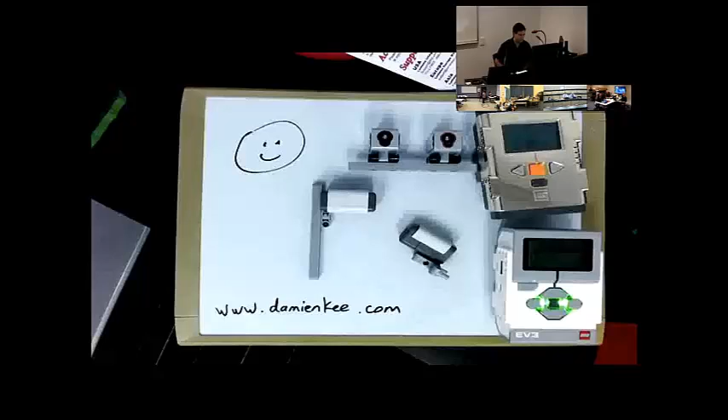Now, you all look very, very tiny to me, so I'm just going to get you guys to wave your arms madly if you've used the light sensor before. Wave your arms madly if you've used the light sensor before. All right, now wave your arms madly if you've never used the light sensor before.

One, but you're in a room with people that have? All right, excellent. So what we're going to do, firstly, is get ourselves some readings. So what I'm going to do is set myself up a little bit of a line here. So here is my black line that I'm going to follow.

It's pretty crude, and I can see in the video feed that you guys have brought your own, either printed out or a bit of masking tape or something like that. What we're going to do, I want you please to grab your device, and we're going to bring up the view menu.

There are two different ways to do that. If you're in an NXT, we're going to scroll across until you find the view menu. Select the view menu, scroll until you find the one that says reflected light, and then it's going to ask what port you're connected to, and we're going to say port 1. So I'm going to grab a cable here and pop it onto a light sensor, and I'm going to select port 1. You'll notice instantly that there's some red light coming out of that. So that's with the NXT.

With the EV3, it's slightly different. Across the top we've got our 4 tabs: play, 2 bits of paper, 6 circles, and a spanner. We're going to go across to our 6 circles. In there, find the one that says port view, it should be the top option. Inside that, you can then have a look and see what's plugged into your EV3 device. So I'm just going to plug this one in here, and you'll see again some red light coming out.

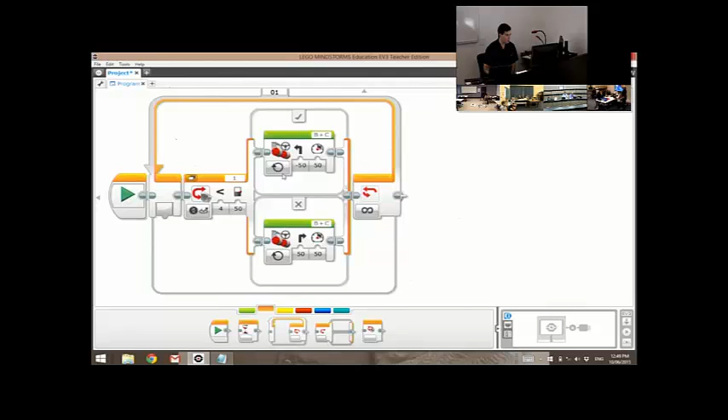and loop back to the start, so we can do this over and over and over again. Take a measurement, turn left or right. Loop back to the start, take another measurement, turn left or right. Loop back to the start, take another measurement, loop back to the start, and so on. So can you see how this loop will just keep going and going and going? And it'll just follow that line all the way along.

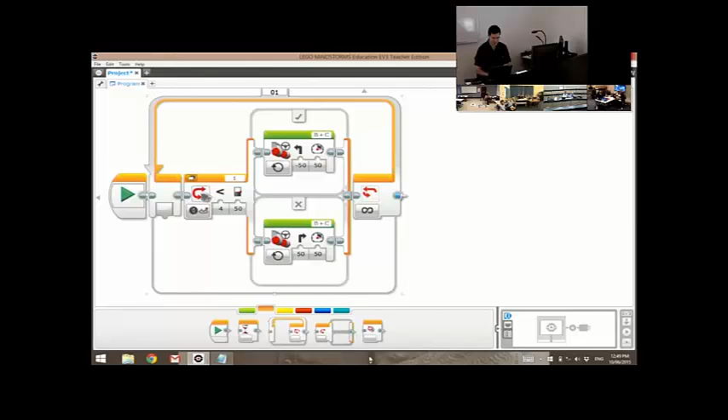All right, so for those people doing NXTs, let's flick across to the NXT programming language. NXT works exactly the same way, the ideas are exactly the same, it just looks a little bit different. So let me maximize this. I'm going to start a new program.

This bottom one down the bottom here is our switch, this is our decision block. So I'm going to put that decision block in there. What do we want to make the decision based on? Light, it's going to be a light sensor.

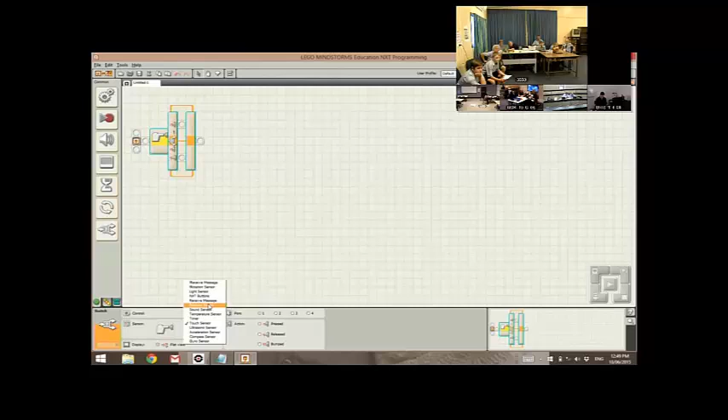Within our NXT, can you see how there's a bright sun and a dark sun? Yep. So the bright sun says I can see a high value, and the dark sun says I can see a low value. If I can see a high value, what does that mean? White, is that black or white? White, that's going to be white.

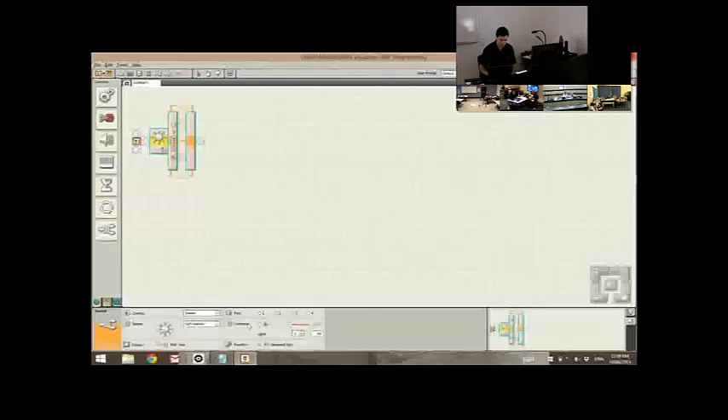What did I say I wanted to do? Follow black. If it's white, we're going to turn towards the black line, which is turning to the left. So I'm going to take that all the way across, and then I'm going to bring it back one little notch. That's the tricky thing with the NXTs, take that steering all the way across, and then bring it back one little notch.

And how far do I need to turn? What sort of duration do I want to go?

Which one of these do I want to choose? Unlimited. It's going to be unlimited. Because I don't know, I just keep turning until I see the white line.

No, you said do it and then take it back a little. Drop the power level down as well. 100's a little bit too fast. We're going to start off nice and slow, just make it 30% power. And I'm going to do the same at the bottom here.

But what's going to be the difference with this one? It's gonna see the dark. This one's going to see the dark. So we're going to choose unlimited, and this time we're going to turn to the right, all the way across, and then one slight notch. I'm going to make this 30% power.

All right, do I need anything else with this one here for NXTs? No. Oh, I'm forgetting something. What am I forgetting? The dark numbers, the percentage. Percentage is right in here. What was my percentage again? 50. So I don't have to change mine.

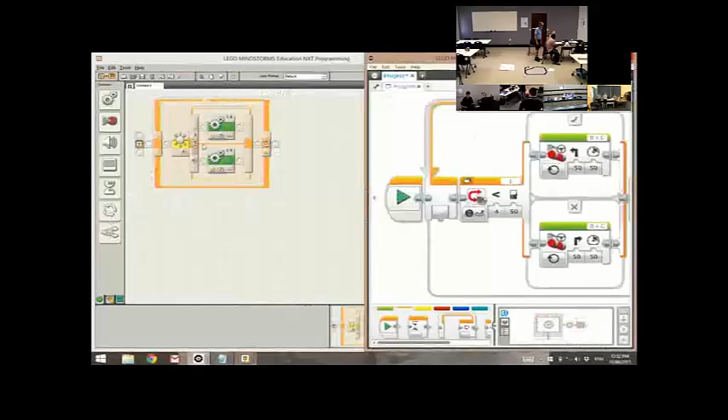Can you please show again how to loop with the EV3? So loop with the EV3 is this block just here. So if I do that all again, let me take that outside the loop. Delete the loop there. So I'm firstly going to, and then I'm going to drag that one inside the loop.

All right, I can see one robot following that line quite nicely. Yeah, it's coming off every now and then.

With all this line following stuff that we're doing, there are many, many different ways of doing it. So just because I'm showing you this one particular way, doesn't mean it's the only way to do it. Oh, I can see another robot following a line. Excellent.

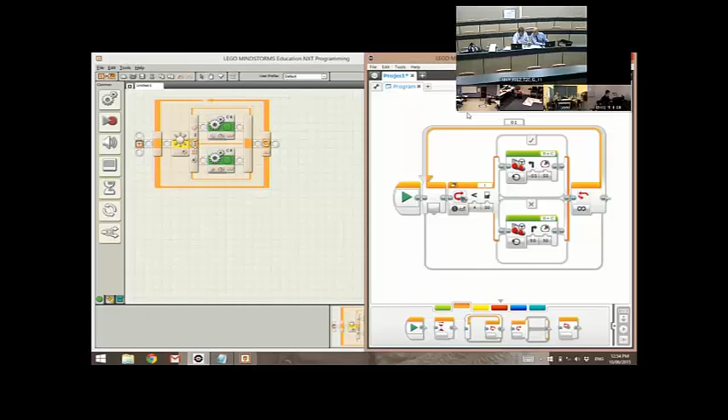100. All right, wave your hands madly if it's not following the line. Everyone got a line following working? Excellent. So that is our absolute basics of getting a robot to follow a line.

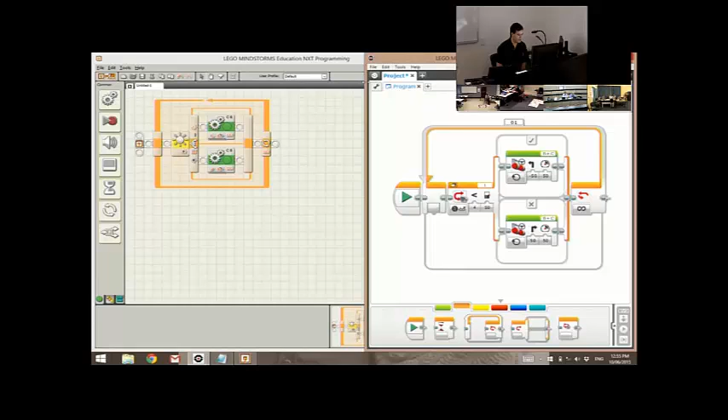The next step is how do we make it better? All right, here we go. Following a line with one light sensor is not too bad, but this is what we call an edge follower. You're not actually following the line, you're following the edge, and it's either going either between black or white. A better way to follow the line is to use two light sensors.

So, coming back to this here, I'm going to set up two light sensors. I'm going to grab myself another cable. All right, so what I have now is two light sensors, with enough distance apart them so that it goes either side of my line.

And what I want my robot to do now is to follow down. And every time that that hits, I want it to correct, and every time that one hits the line, I want to correct it back to the center. This gets a little bit trickier with our programming.

Damien, can I ask a question? Yes. Is there any good distance apart? Like, would you prefer it to have, say, 10 mil space on either side, or 5, or make it wider? Is there any advantage by having a narrow or a wider sort of spacing between the two sensors? Each of them have their own benefits. So let me just start by doing a really, really wide one.

If you've got a really, really wide one, like this, fair way apart, when the line starts to curve around, let me just do a curvy line around.

My lovely artwork. When the line starts to curve around, you're better off getting that line curving. However, when you're on a straight, you're going to bounce a lot more from side to side. So there's a real trade-off, and there is no perfect value, unfortunately. You just have to test it with your robot to see which one works best on the mazes you're trying to do. So unfortunately, I can't give you a solid answer on that one. Let me just move mine a little bit closer together.

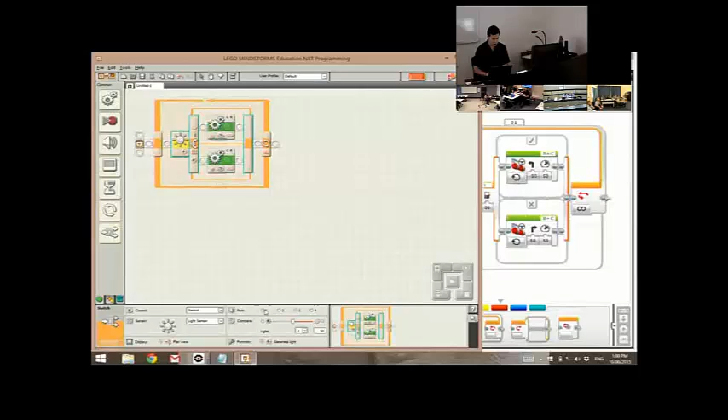So let me go back to here. With the NXT software, currently this makes a single decision based on port 1. I'm going to get rid of that for the moment. So now, if port 1 sees white, I'm going to do this instruction. If port 1 sees white, what should the next thing I need to do be? Do I have enough information from port 1? No. So what do I need to do once I've figured out port 1 sees white?

I need to figure out what the other one sees. Right. So what I'm going to do is put a switch inside a switch. So what's this switch going to do? Light sensor.

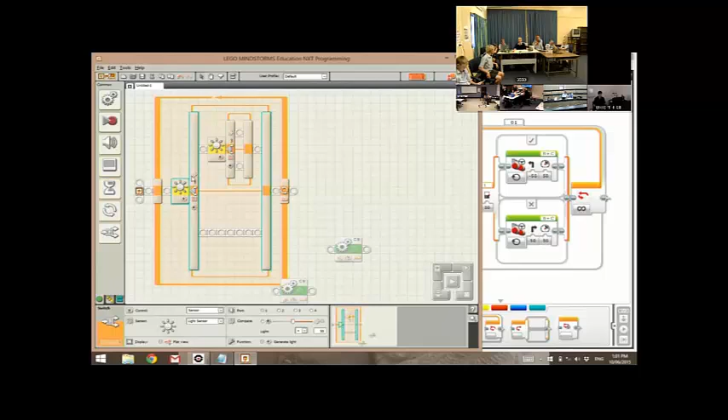Which port? I already know what port 1 is - I know port 1 is white. Port 2. So I'm now going to look at port 2. So now, that's 1. This one here is 2.

If number 1 sees white and number 2 sees white, what should the action be? Straight ahead. Again, we're going to stick with the unlimited and in a straight line. Number 1 sees white and number 2 sees black. What should I do? Turn right.

If number 1 sees black, what should I do? Turn left. Well, what about this one down here? That one's also number 1 black. How do I know which one to choose? You have to check number 2 as well.

So if number 1 sees black, let's check what number 2 can give us. I'm going to make that one a light sensor. What port's this one going to be on? Number 1 sees black, number 2 sees white. What should we do? Turn left, turn left.

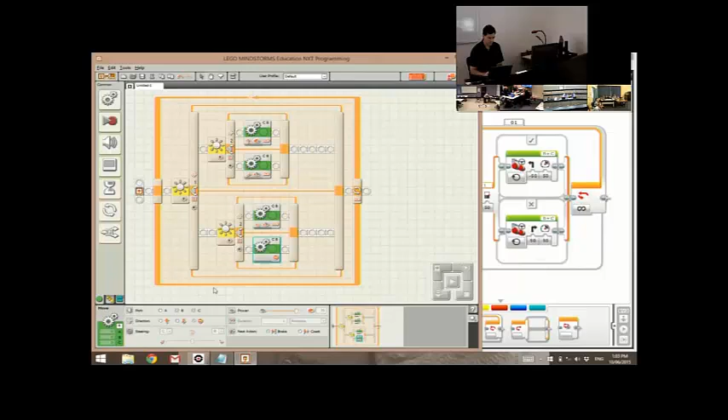1 sees black, 2 sees black. So black and black, what does that mean? Stop, let's throw in a stop there. Don't forget, you'll have to put your threshold values, and light sensor 1 will have a different threshold value from light sensor 2. Does that make sense? NXT guys, off you go and start putting that together. EV3 guys.

Works on exactly the same principle. We are going to put a switch inside a switch. Let me just shrink this down a bit.

So the first one, number 1 sees less than, so that's going to be my black. And light sensor—sorry, we're using color sensor. Color sensor, compare reflected light intensity. Remember with EV3, we're currently with a less than. Less than means black's on the top. So we're going to check port 1 first, and then check port 2.

If I see black and then black, what do I want my robot to do? We're going to stop our robot. We're going to apply the brakes.

If I see black and then white, the robot's going to turn. Oh, not that one, this one here.

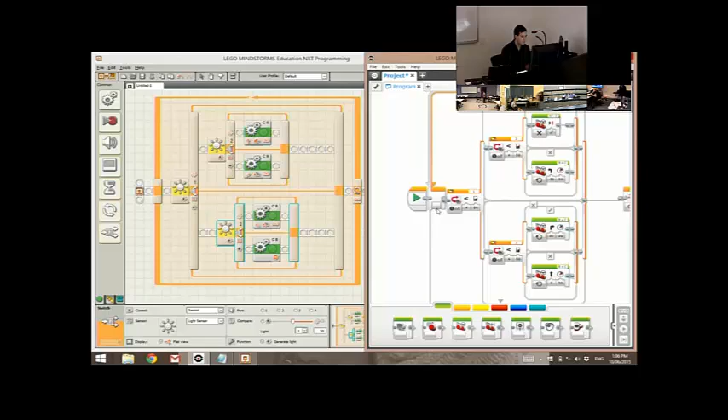Jason, just a quick note—my system here says this session is not being recorded. It is, it's a different device recording, so it's fine. No worries.

Alrighty, wave your hands madly if you've got it working. Not yet. Wave your hands madly if you're still putting together the program, still assembling it. All right, so people are on to testing now.

I'm not after a perfect line follower today. I just wanted to see it bounce left and right.

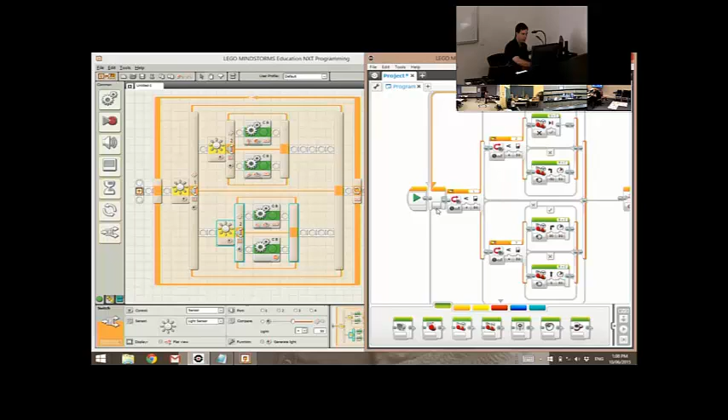So I saw one going in Rockhampton. Gladstone, have we got it going yet? Running the kids program. I thought I saw one going with Gladstone—we definitely had a one light sensor following. Biloela, how are we going? We just changed the sensors and we're ready to go in a second. Excellent.

How are we building at the moment? Assembling.

We have a few people trying it in Rockhampton here, Damien. It's a bit hard to see with the screen, so they keep coming over to check exactly what you have here. Yeah, unfortunately I can't make them much bigger than that. If there's any specific block you want to know about, let me know and I can highlight it.

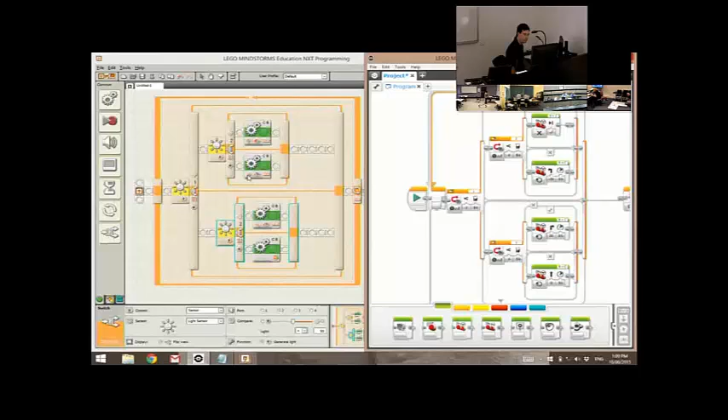Mackay, how are you going, Mackay? We had to rebuild the robot, would you believe? So we've got the program ready to go. You just don't have a robot. That's all right.

All right, so I can see a couple going in Rocky, which is fantastic.

Gladstone, you're still putting together some bits and pieces? Yeah, since the EV3 has stuck, it's not. We have shut it down and restarted again, and it is not starting up. Restarting the robot, okay.

Oh, yes, thank you. That would make a lot of sense. That's because I'm cheap.

So if you've got it up and running, I want you to have a think about possibly things like turn angles or speed. Is it better to do your turns slower? Is it better to do your forwards fast or slow? Just have a little play around with those different properties and see if you can get your robot following the line a little more smoothly or a little better. Maybe your turn angles.

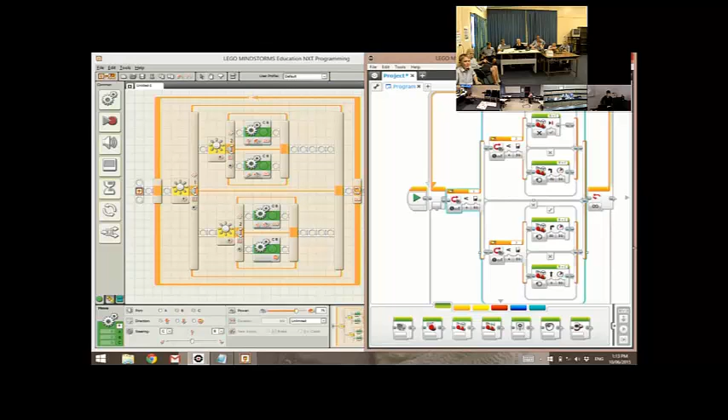When is this going to stop following the line? Anyone? Until it hits double black. No, it'll never see that, it'll go forever. How do you know it goes forever? Because it's got the loop. It's got the loop, and the loop is currently set up to be a forever loop.

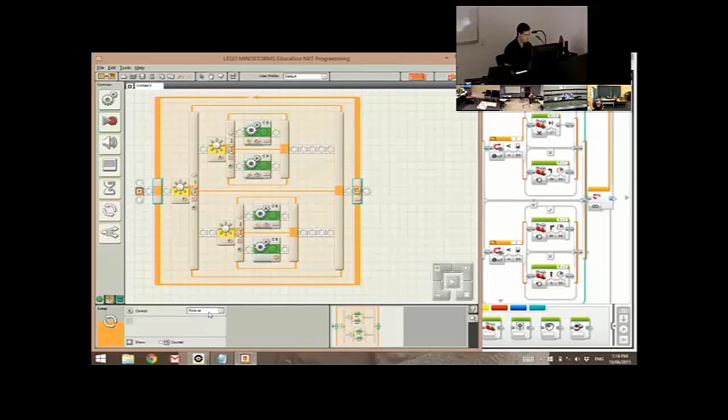Rather than doing a forever loop, what we want to do is say keep looping, keep line following, line following, line following until something happens. Now let's ignore the green shortcut markers. What's the one other thing in our rescue competition that we need to be thinking about? Getting the person back. Yeah, how do we know we're at that spot? Not sure.

So who's got the little bit of aluminium foil or a bit of silver tape? Yep, we've got some. So in the rescue competition, what we have is a band of silver tape or aluminium foil right at the end, so the robots can see that they've made it to the end.

So rather than doing this loop forever, what do I want to do this loop based on? Silver. Yeah, we want to loop, line follow, line follow, line follow, until we see silver. So what was that? Which one of these do we want to choose? We have to find out the percentage - we're going to do a sensor. Which sensor? Should we do this based on a touch sensor?

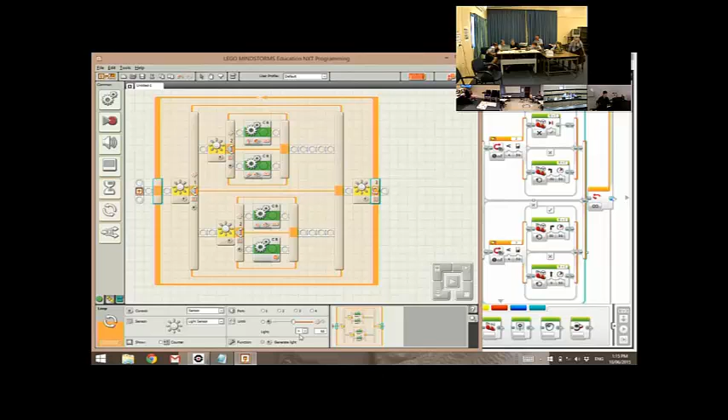No, not a touch sensor, a light sensor. We'll have to see what percentage silver is. Now the most important thing, are we going to loop until we get a greater than value or a less than value? Is that silver going to give us a big value or a small value? Probably massive. Why is it going to give us a bigger value? Because it's shiny, it's nice and shiny, it's going to shine all that red light back.

So you will need to take some readings. Imagine it being 100. Find out what your threshold value is for silver. For EV3 people, we're working exactly the same way. Instead of running an unlimited loop, we're going to do a loop based on a color sensor.

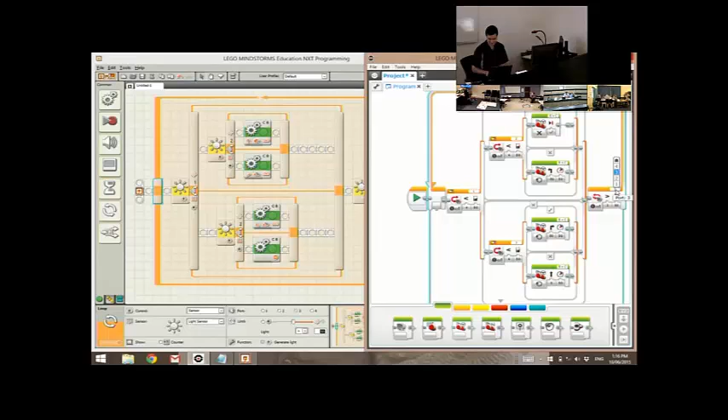Reflected light, and in this case, we're going to be looking for a greater than condition. Which sensor are we looking at, light sensor 1 or light sensor 2? Doesn't matter, it's your choice. I'm going to choose light sensor 1. I forgot to choose it over here. Light sensor 1, just there.

Let's see if I can just move this one along a bit. Light sensor 1, it's probably going to be a high value, might be say greater than 70. There we go. So now, rather than just going line follow, line follow, line follow forever, we're doing line follow until we reach the silver. I'll give you a couple minutes to do that. If you don't have a second light sensor, just do the one light sensor line following, but do the same thing at the end there. Instead of doing a forever loop, just do line follow until you reach silver.

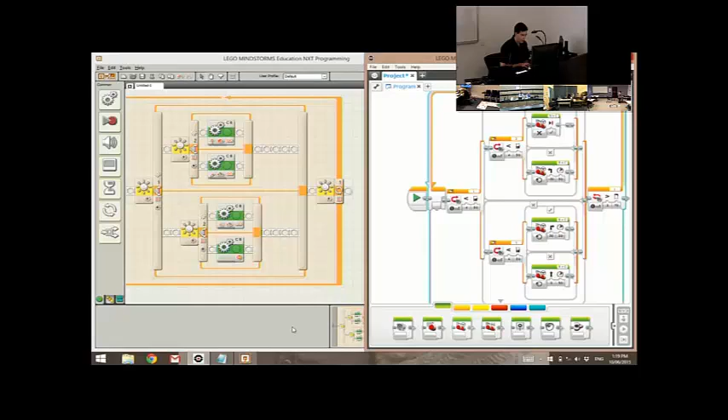It just says starting. Okay, with your EV3, what I want you to do is hold down the left button, the center button, and the cancel button, all at the same time, all three of them. This is the robot's Control-Alt-Delete. Left button, center button, cancel button, hold that down for 3 seconds. Did that do a reboot?

It's not starting, it's saying starting, but it's still hanging up in there for a long time. It did turn off and then it's got the same thing. All right, so it just says starting now. Give it about 20 seconds and see what happens. Damien, this is Andy Wheeler. Can I ask you a question?

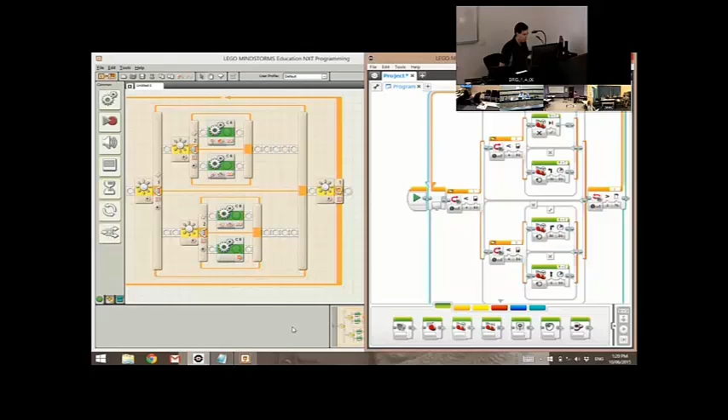Yes. To work out the threshold of the silver, what do I calculate? Do I take the black or the white reflection and then the silver reflection, and which one do I add up and find the average? So what we want to do is tell the difference between silver and everything else. Silver is probably going to be our highest value. What's the next value? What color gives us our next value down? The white, on port 2.

So we want to tell the difference between silver and white. We don't want to tell the difference between silver and black, because what color is in between silver and black? White. White's in between silver and black. But we don't want to accidentally pick up white, we want to know what the difference between white and silver is. So let's go halfway in between white and silver. That gives us a reading that's very small, just like 1%. It's 1% higher than the white, the silver is only 1%.

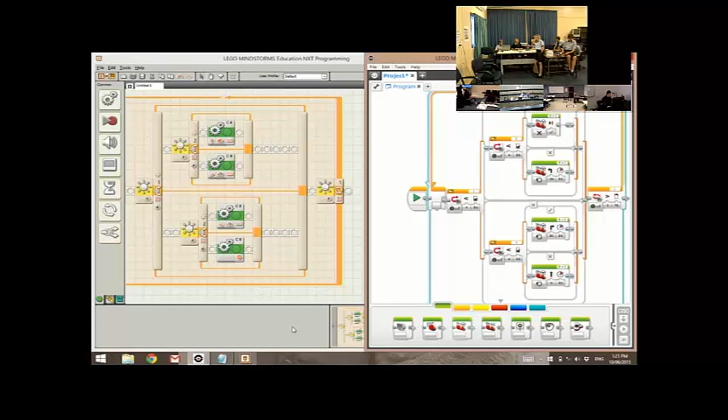On port 2, the silver is only 1% higher than the white. Your sensors, are they quite angled? They look a little bit angled there. I'm wondering if that's throwing the light away.

Have you got the really, really shiny aluminium foil? Yeah, that's shiny. Just try holding that aluminium foil right next to the light sensors, about 2 or 3 millimeters away. Don't hold it directly underneath it. Okay, sit on these two.

So is that giving only a little bit? No, where the robot sits now it's giving 63. And what does it give for white? What does the white one give you? The white one gives us 64. And the silver gives you 63.

Can you just tilt this silver up a little bit so it's parallel to how the light sensor is going, 90 degrees, perpendicular? We want to try and reflect that light back into the sensor. That's 94... 90, that's 90, better. So what's happening is that red light is shining down and it's bouncing away, out. Okay, so we'll make it 90 degrees first.

So for today, I'm just going to get you to wave the silver in front of it at an angle so that it sees it. Otherwise we'll spend too long pulling it apart and rebuilding it. Understand? Yep, understand. All right, so Bill Wheeler, I want you to give that a go, see if you can follow a line and then wave the silver in front of it to get it working.

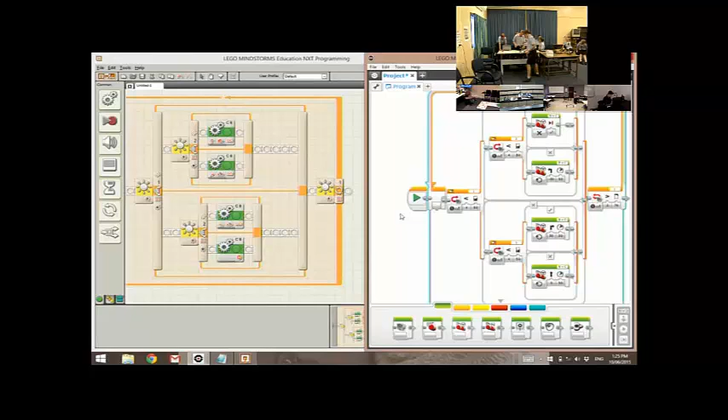All right, Gladstone, I've got a set of instructions for you. Listen very carefully. Hold down the back, center, and right button, and keep them held down. When the EV3 brick restarts, release just the back button, but leave the center and right buttons down. When the screen says updating, release the center and the right buttons.

Did you get that updating screen? Let's do it again. So the center, the back, and the right. Hold it down until it reboots, and then just release the back button, but leave the center and the right button down. Not doing anything, is it rebooting? No. Back, center, and right?

Updating now, got it updated. All right, so now that it says updating, click on the download button in the firmware update. So on your software with it plugged in, see if you can download the firmware.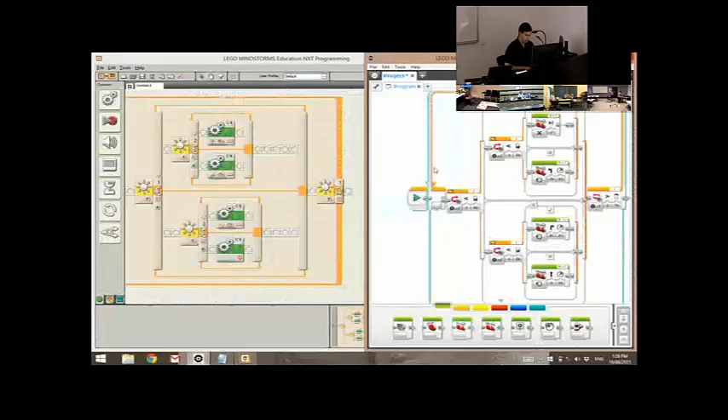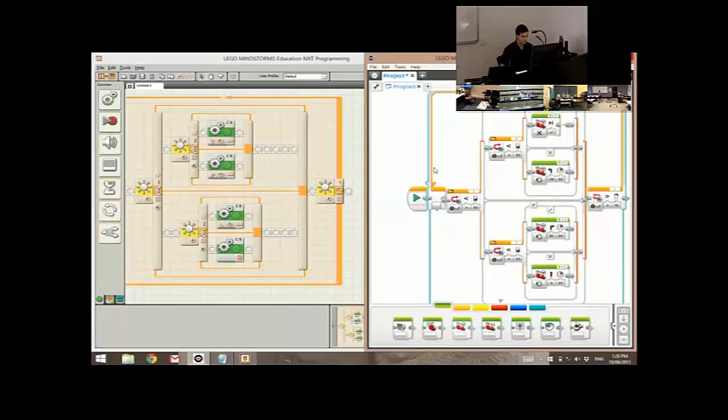Damien, if you don't mind me butting in for a moment here. Yep. I've come across quite a few NXT bricks in recent times that have appeared to have died. Now it sounds like you have some methods to restore it. Is there any chance we could work collaboratively to put some information on our website about how to try resetting it and getting one up and running? For example, one of the schools I've been working with recently had 8 NXT kits and 5 weren't working. I managed to get 2 by updating firmware, but 3 were still failed. So some tips and advice on how to reboot or reset it would be greatly appreciated.

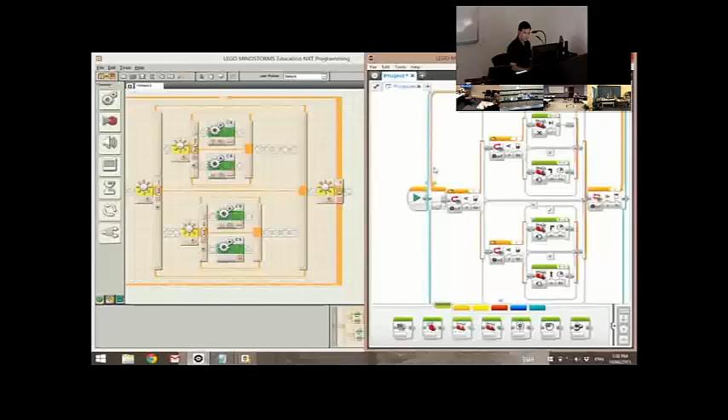So that's the basic idea. I can see a bunch of people have got that kind of working, which is great. You'll have a bit more time when we all finish up to have more of a play with that one. With that program, I highly recommend you save it and call it '2 light sensor line following' or something like that so you can bring it back up later.

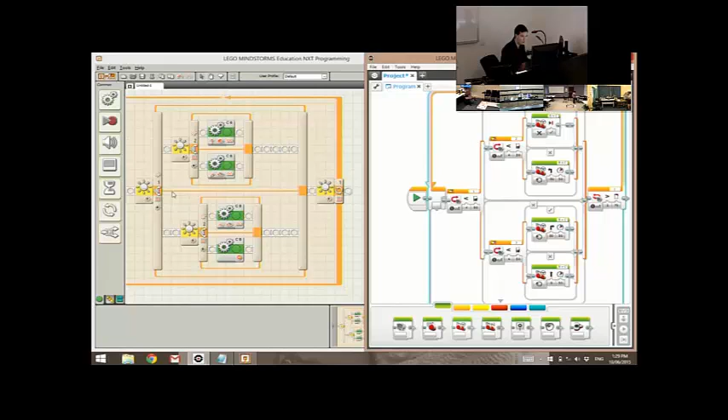At the moment, we're line following until we get to the silver. When we get to the silver, what do we do? According to our program, what do we do? Stop. Do we actually stop? It stops running. Yes, the program stops running, but is that the same thing as the robot stopping?

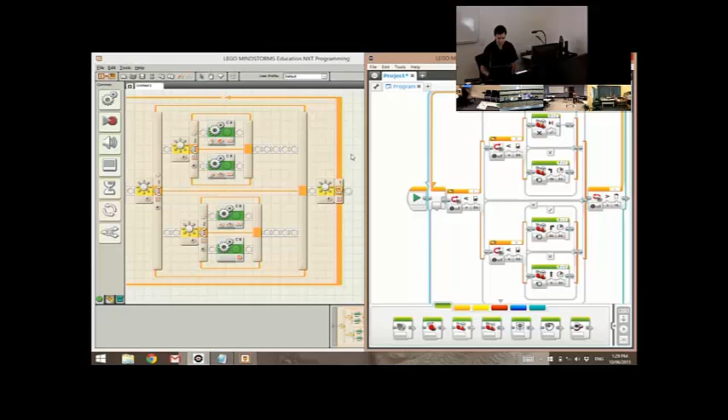No. So what we should be doing is, when we finish our line following and find the silver, we should get our robot to stop. So that'll stop the robot.

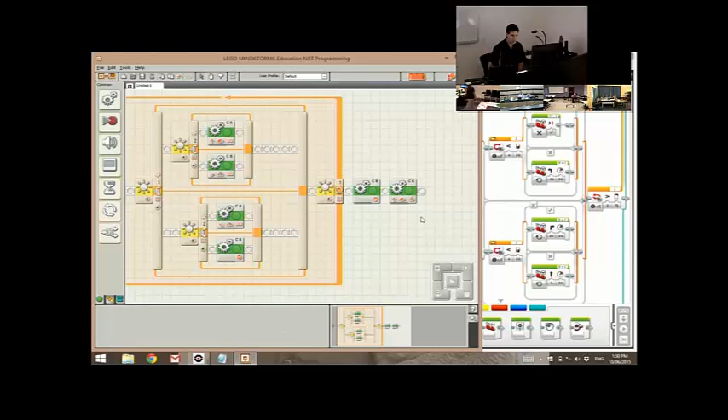In terms of the RoboCup Junior Rescue Challenge, once you see the silver, you then need to go looking for the person. So what we could do is, after I've stopped the robot, do a little bit of a drive, maybe 2 rotations, to get into the center of that green mat. Yep, I'm in the center of the green mat. What do I need to do next?

Find the person. Yeah, we need to find the person. What sensor are we going to use to find the person? Which sensor could we use? The distance sensor. The distance sensor on the front.

So I'm going to say: line follow until I get to silver. When I get to silver, stop the motors, drive into the center. What should the robot do now? How does it find the person? What instruction do we need to tell it? To scan, don't we? To scan.

What do you mean by scan? What is the robot doing when it's scanning? Turning, yeah, right and left. I'm going to put a turn in here.

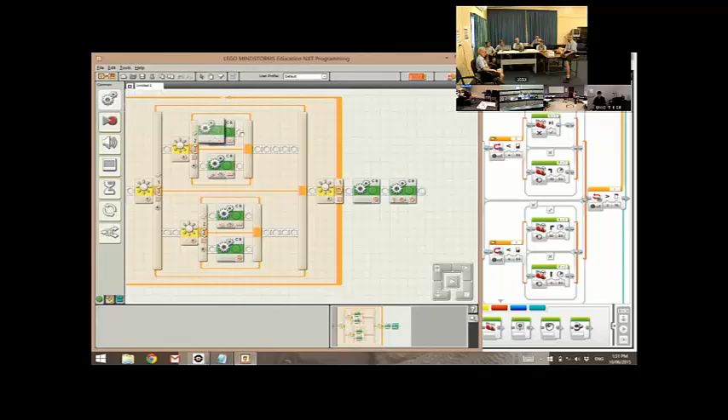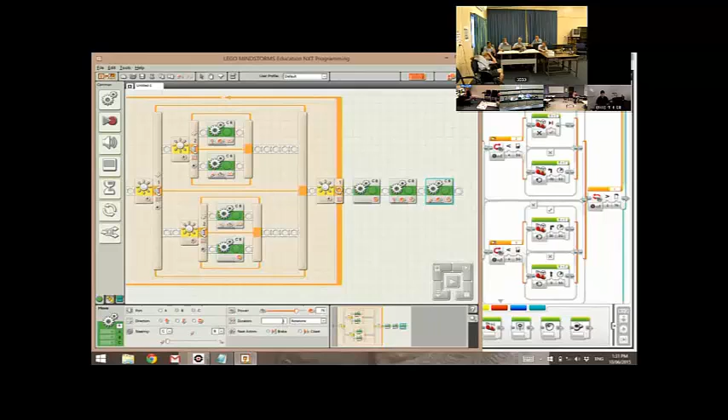I'm going to do a turn to the left. How far should the robot turn? You can just leave it unlimited, until it sees something. Yeah, until we see something. I don't want to turn for, say, 10 rotations, because that means the robot's effectively going to close its eyes, turn 10 rotations, then open its eyes. So instead, we choose unlimited, which says turn, unlimited.

How do we know to stop turning? By sensing it.

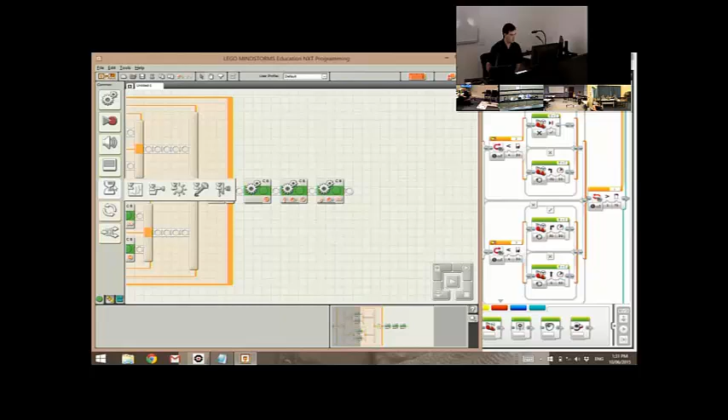All right, we're going to grab a wait command. Wave your hands madly if you've used the wait command before. It swings around - what am I waiting for? It's the second one, I've used one. What am I going to be waiting for?

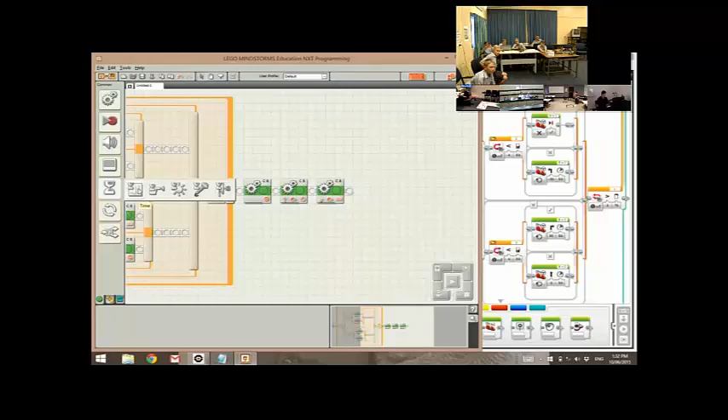Till you see something - is that time? I'm waiting for touch, light, sound, or distance? You get time? Time? We use the wait, you time it. Yeah, it's not going to be time - I don't want to turn for 5 seconds. Sensor. Yeah, it's sensor, distance sensor.

So I'm going to grab that distance sensor and just drop it there. As it's turning, is it looking for a greater than distance or a less than distance? Motion - would it be a rotation sensor? A less than distance. Less than how much?

Let's keep it fairly small, around about 20 centimeters. If the person's here, after it sees the object less than 20 centimeters, what should the robot do? Go towards it.

Let's just take it one step back and say, how do I know that it's seen the object? What should I do? We're just going to make it stop.

So this is now saying line follow, line follow, line follow until I see silver. Stop the robot, drive into the middle, start turning until I see something less than, and then stop the robot. That should end up pointing towards our little victim, our little soft drink can.

In EV3, we do it exactly the same way. This will give me line following, line following, line following until I see the silver. I'm then going to stop the robot, drive forward about 2 rotations. Feel free to change these things to suit your robot.

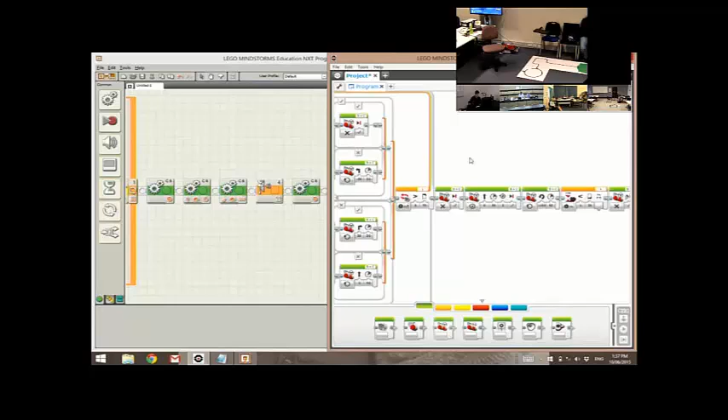Also, some people may have the actual education kit but installed the retail software because it's free and easy to download from the Lego website, so they just need to install the additional sensor module which can be found there. Thank you, Jason. So on the Lego website, if you have downloaded the retail software, there is an extra block that you need to install so that you can use the ultrasonic sensor.

All right, so I'm going to do a quick run through. Biloela, how are we going? I'm going to request... it's not spinning. Oh, maybe that's straight, it's not spinning yet.

All right, so does it follow the line to silver? Yeah, it finds the silver, drives forward, and then doesn't turn around? No. All right, so the question now is...

You're only turning until you see a value less than a particular amount. What is your threshold to see the object? What have you got that set up as at the moment? So I'm looking for this distance, less than sensor, 20. Less than 20 what? Centimeters. You're definitely on centimeters? Yep.

All right, so what I want you to do is hold your robot up so the ultrasonic eyes are just pointing into empty space, not towards anyone. Press the run button, hold it in the air, not the table either. Up in the air, off the table. Press the run button, I should be hearing line following. Oh, I can turn it on first.

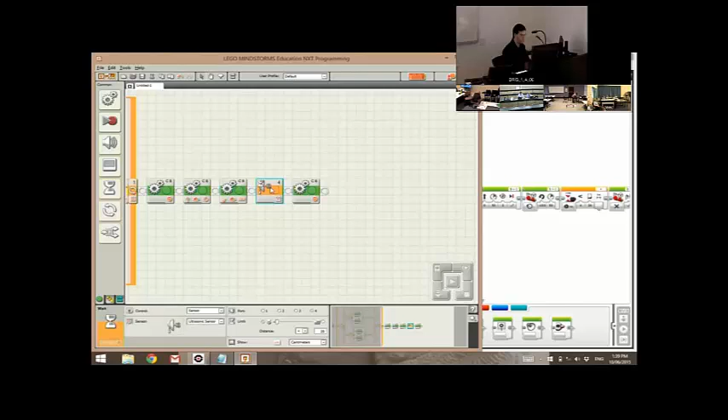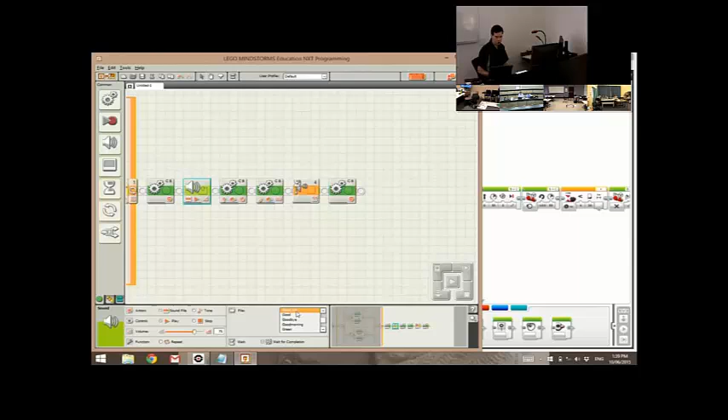What I'm going to get you guys to do, looking here at the program: at the moment it line follows until it sees silver. As soon as it sees silver and stops the robot, we're going to put a sound effect in. There's nothing on that one. I want that sound effect to say 'good job.' Then I want it to drive into the middle, and before it starts turning, it's going to say another sound effect: 'good morning.' Then it will start turning until it sees an object and stop. After it finishes seeing the object and stopping, we're going to put another sound effect at the very end that says 'goodbye.'

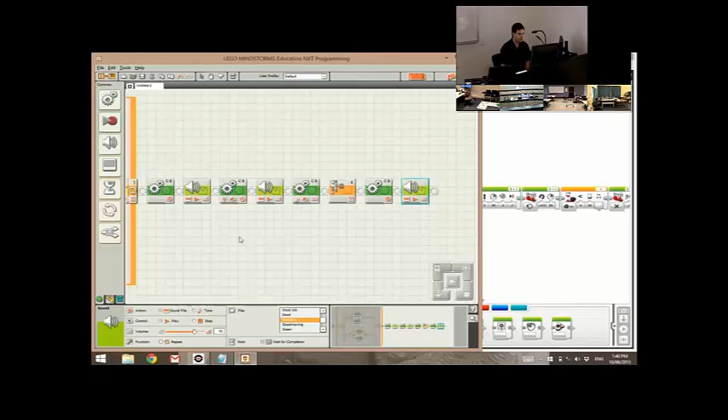Not the right sound effect. So what we're doing here, guys, is called debugging. I actually don't know what your problem is, but by putting these sound effects in, we can try and figure out whereabouts the program is getting up to. It will stop when it says that. That's what we're hoping.

What port is your ultrasonic sensor plugged into? What's it plugged into? 1. No, it's not plugged in. Oh, that's our problem, it's not plugged in? The setting one has to go there. That should hopefully fix it.

All right, Mackay, how are you guys going? See up there, the sound effect is after 'Mackay, how are you guys going?' Yeah, there we go, that's okay. That's so funny.

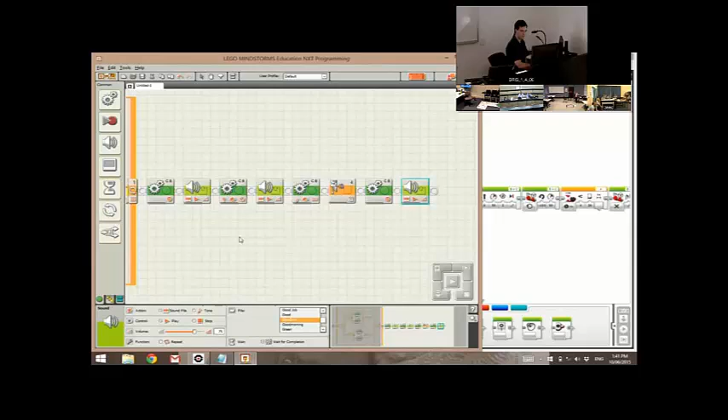Mackay, I think you're still muted. Are you guys under control? You told me to lock that off. Yeah, we're getting it sorted, Damien, thanks. Good, any questions? It's all good.

We haven't got an ultrasonic sensor, so we're going to improvise and use a touch sensor instead. Hey, no worries.

Rockhampton, how are we going in Rockhampton? Not so good, they're working on it. Any questions, or they've got some ideas to test out? So we've got one that's managed to accomplish it on the NXT, and two that are currently running EV3 that are currently debugging as we speak.

Gladstone, just now the first program, the single sensor one, but the motors are not working. I'm just checking they're in the good spot. So check the ports. What ports do you have your motors plugged into at the back of the robot? B and C? Then check your program, does it say B and C? Yes. Just check your plugs are plugged all the way in, sometimes those cables hang a little bit loose. You should get a nice click as that little locking latch goes in.

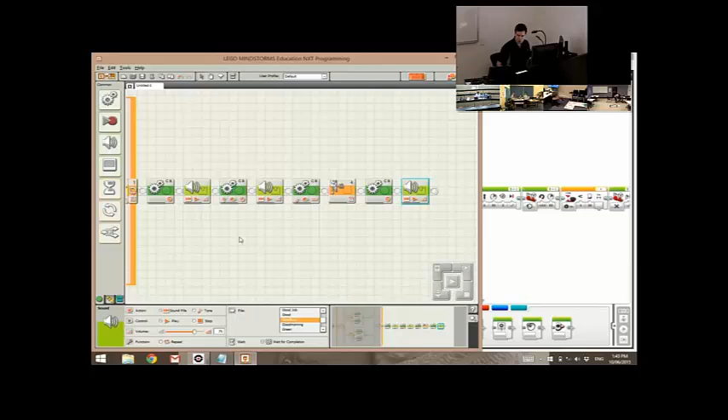Sorry, I missed that, can you say that one again? Is there any specific power value that we need to use? It's got 15 for the power. 15 for the power? 50 should be enough power to go. Just try opening up a brand new program, keep the same project, but use that little plus button, open up a new program and just say drive forward for 5 rotations.

Biloela, how are you guys going? Just testing again. Oops, yeah we got it. It didn't spin though. It didn't spin? It didn't need to, it sensed it because it was right in front of it.

No, you're supposed to make it turn. No, you've got to let it spin. Yeah, okay, you've got to take the paper away, and everyone has to move. Take the paper away. No, that's it, it's spinning. Gladstone, we're driving now, are we? It's not spinning.

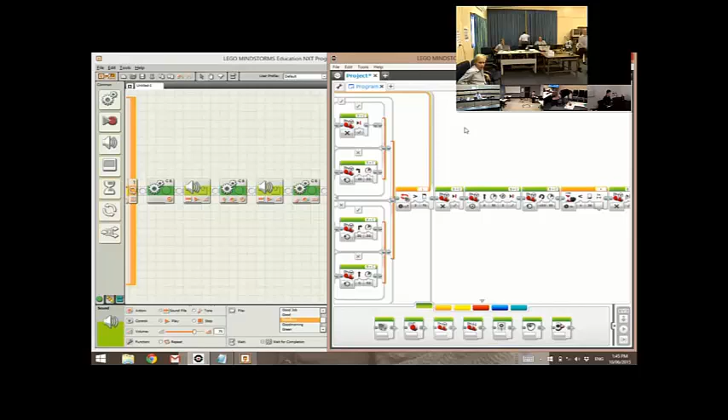So Gladstone, I saw one robot there turn towards an object and stop. That's excellent. It tends to overshoot a little bit though.

Yeah, you'll find with the ultrasonic sensor, the ultrasonic sound waves spread out as they travel, and you just have to compensate for that. So perhaps as soon as you see an object, just turn back a little bit. Perhaps you need to slow down your turning.

Damien, can you scroll back with your NXT program, please, to the loop? I didn't know what to bring, so. Thank you.

Was that success in Rocky I just saw? It stopped and went ahead too quickly and missed the can.

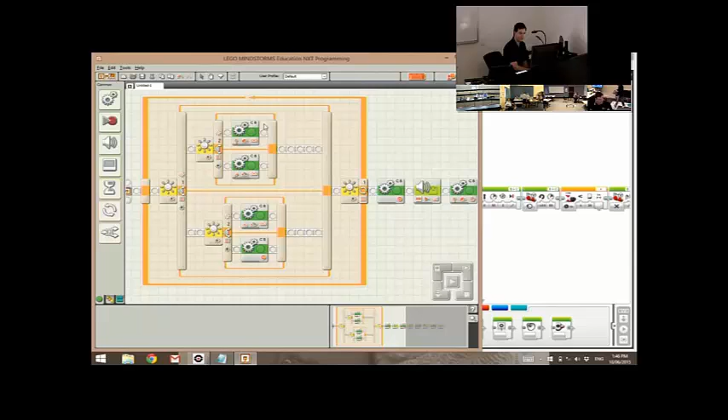So Damien, if you could spare me a moment, can you go through the logic between the exit of the loop, i.e. it's found the silver? I just want to see that logic again on the EV3 software, please. On the EV3? So with our EV3, there is our 2 light sensor line following.

Sure. And as we're following the line, our loop, this is what we call a loop condition. Normally, or the default, is just to loop unlimited, and that would make you follow the line forever. But we don't want to follow the line forever. We want to follow the line until some condition occurs with our color sensor.

And in our case, based on reflected light intensity. Now, the silver foil is going to give you a much higher light reflectivity. And so we're looking for a value that is greater than. So I've chosen the greater than condition, a particular number. So if your silver is around about the 90%, then you're probably looking for a value greater than around about 80%. Anything greater than 80 is going to be silver. Anything less than 80 is not going to be silver. It's going to be white or black.

Okay, and as soon as that condition has been met, we then break out of the loop and start doing our next set of instructions. So in my case here, stopping the robot, driving into the center, starting to spin around until I see that object. Cool, thank you.

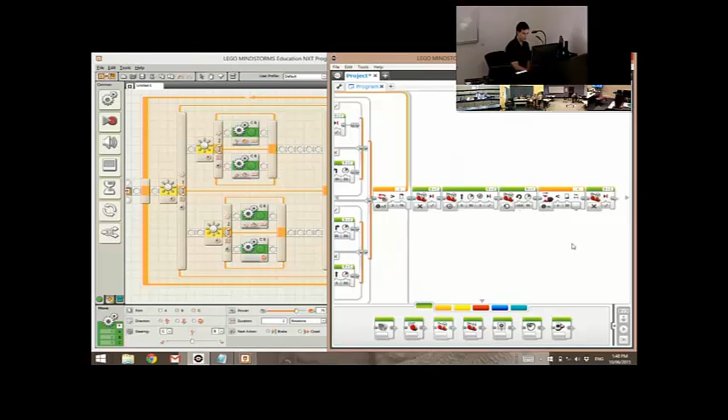Damien, when we drive the robot into the centre, is the victim in the centre? No, the victim is randomly placed and can be absolutely anywhere, and that'll be the judge's discretion. So we could run into the thing while we're driving into the centre.

Quite possibly. So perhaps driving 2 rotations is not the smartest thing to do. What you'll need to do is figure out, based on what you already know, how to get around that.

A quick little hint for you, everyone just watching up here. What we can do when we are following the line, as soon as we see silver and then stop the robot, it's always really handy to throw in something like a sound. So I'm going to put in a little sound effect in here, Lego sound effects. I'm going to put in some communication, and I'm just going to say, fantastic.

And what this means is it's going to go line follow until it sees silver. And then what will happen as soon as it sees silver? It'll say fantastic. What happens if it doesn't say fantastic when it sees silver? It means we've probably got a problem around about here. So by having that fantastic in there, it allows us to try and isolate what the problem is. If it's just following the line randomly, and then all of a sudden it says fantastic before it got to the silver, again, it means there's a problem here and it's accidentally detecting silver.

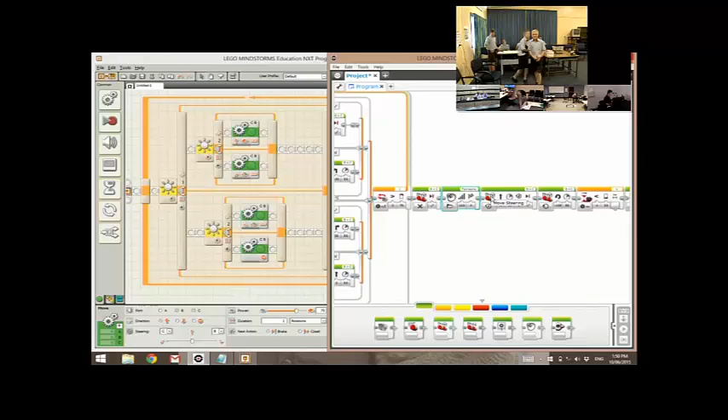Biloela, are you happy with how yours is going? Yep. Yes? Yep. Good. Mackay, how are you going? Yeah, we're good now, Damien, thanks. Excellent. Yeah, it's fun. It's fun. Yep. They got it. It's good. Yeah.

Okay, do it. Oh yeah, we can't. Damien, Biloela again, what are we actually rescuing that day? Is it just an empty drink can?

Empty drink can, yes. It's split into 3 divisions. The bottom division is just pushing the drink can outside the green area. The next division up is to actually grab the drink can, and the top division, our open rescue, is to grab the drink can and lift it onto a platform. But the basic task is to identify the victim and push it to safety by pushing it outside the green zone.

So if we practice with a drink can, does it matter what color, whether it's Coke or Pepsi? Take your drink can and coat it in aluminium foil, then put a bit of rice in the bottom as well, about 100 or 150 grams, to give it some weight. And it just stands up straight.

Okay, I will do that one. What division? Division 2? No, just do Division 1, you just push it outside the green. What are the divisions? It's primary, secondary, and then open.

Jump on the website, download the rules. www.robocupjunior.org.au. Download the rules and it'll give you the breakdown of each of the different divisions.

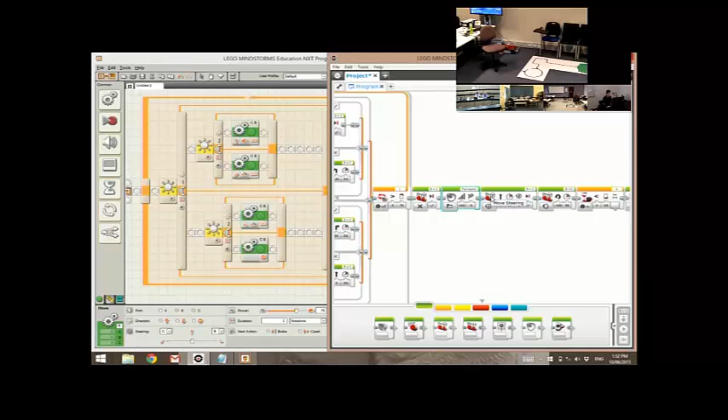So Damien, just to confirm, I noticed as a new entrant this year for the open rescue that there's also a dummy capsule. Yes, we probably won't run that in Rocky this year. I'll confirm that and let everyone know on the list, because when some people were looking the other day it was the first we'd noticed it, so it's new this year and we won't run it at the regional one. I'll put together a list of variations we'll run for regional and email them through to go out to the list. Fantastic, thank you.

Alrighty, I think we're going to move on. Gladstone's got a couple of issues there, we'll see if we can find some time to fix those up, but our robot's working, that's always a good thing.

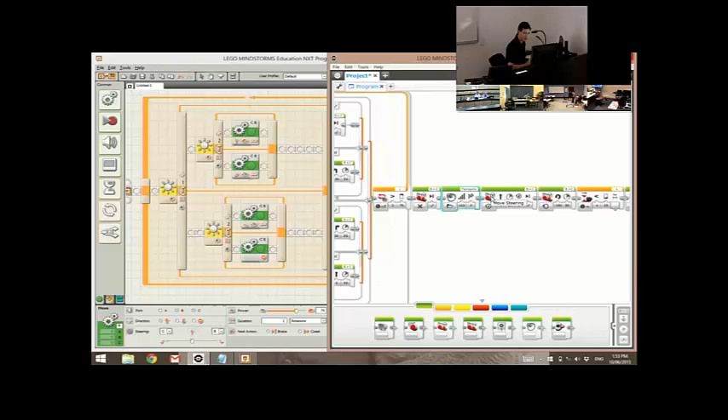All right guys, watch up here. The last thing we're going through, the trickiest thing of all, is the green shortcut markers. On the course set up for the RoboCupJunior Australia Rescue competition, you'll find on some of the paths these little green shortcut markers. What those are saying to the robot is if you go this way, it's a better path. You don't have to take the shortcut markers if you don't want to, you can have a robot come along and around the outside and head off down the line. But if you take the correct shortcut markers, you pick up extra points.

Programming a robot to take the shortcut markers is tricky, there's certainly not an easy way of doing it. So what you guys have at the moment are the basics of line following and doing rescue. Once you can do that really, really well, then you start looking to solve the green ones. I'll take you through the basics - we're probably not going to have time to play with it, but I'll show you how you approach it. Let's suppose I took some readings here.

My black reading was 40, white was 60, and let's suppose silver was 80. Just take a rough guess, where do you think green falls into this pattern? Any ideas? Between silver and white? Between white and black? Between white and black you get green, yes. I'll just roughly choose 50, because it's dimmer but not black.

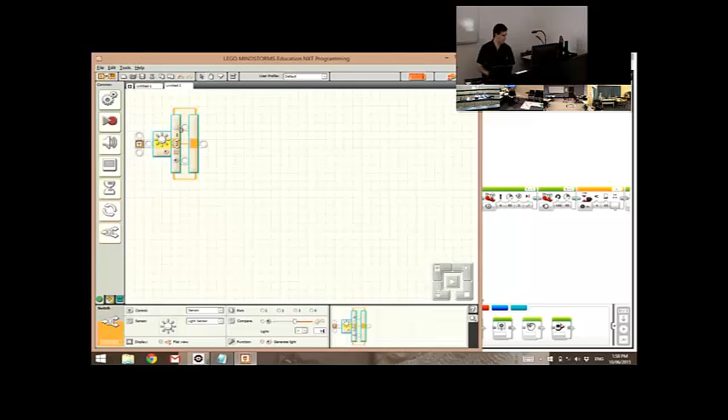I'm going to start off by making a decision based on a light sensor. My threshold, the first one I'm going to choose, is going to be 55. If it is greater than 55, so I've got the little white, sorry, the bright sun there. If it's greater than 55, what do we say that means? White, means it's white. So I'm going to put in this little test program here where I say white. So if the robot sees the white color, it's going to say white.

If it sees less than 55, darker than 55, what should it do? It's not definitely green, it's not definitely black. It's green or black, we don't know. And if I don't know, what should I do down here? We just figure out the threshold. This makes that decision based on white or anything that's not white.

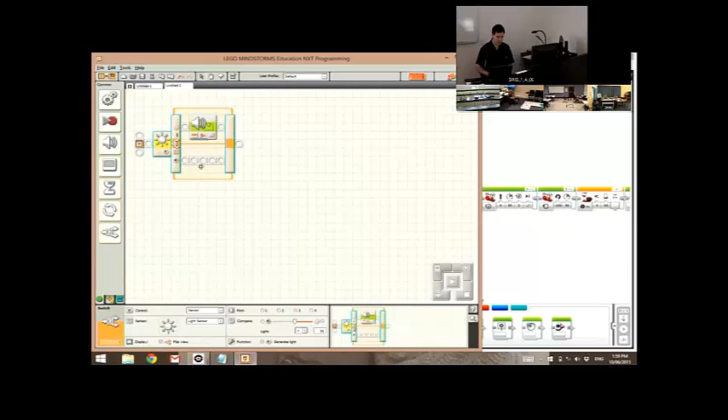So after I decide, okay, it's not white, it must be green or black, I'm going to make another decision. This second decision is going to be based on a light sensor again. What's my threshold value now? What am I trying to tell the difference between? I already know white. Black and green. So this one here, my threshold for black and green is going to be 45.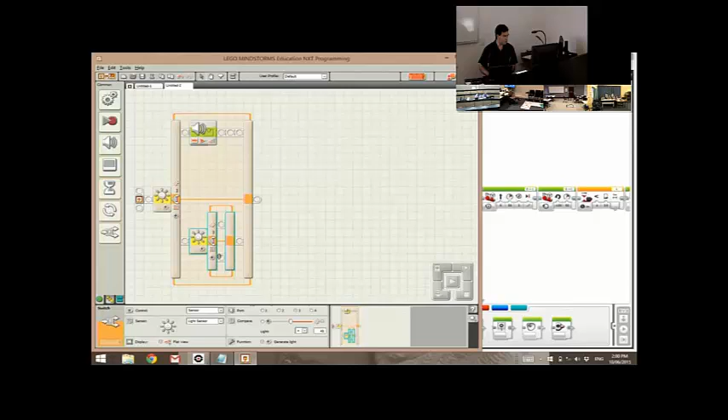So if I now make this one 45, if it's less than 45, what color are we on? If it gets a reading less than 45, what color are we on? Black. So I'm going to pop a black down here. It's going to say the word black.

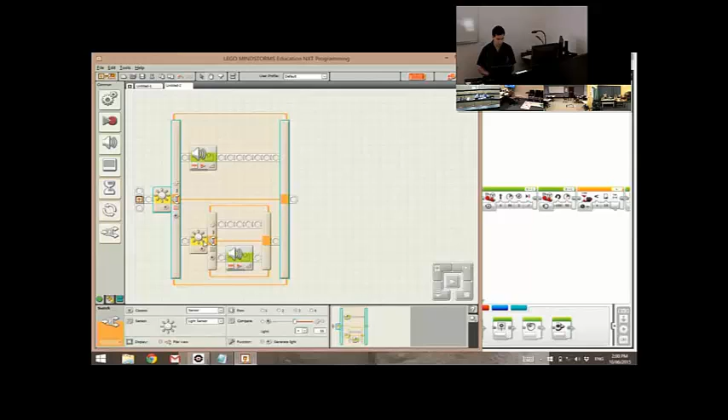However, if it is less than 55, my first decision, but it is greater than 45, what does that mean? Green. It's going to be green. So this one's going to say green. I'm going to put this in the loop.

Based on this program here, is my robot driving anywhere? Nope, not driving anywhere at all. So all we're going to be doing is showing it different colors. So if you pick your robot up and put it down on different colors, it should say those different words.

Let's do the same thing with EV3. Create a new program. Grab a switch block. Switch based on color sensor, compare the reflected light.

I'm going to switch this around to make it a greater than. If it's greater than 55, we are going to do a sound effect that says white. If it is not greater than 55, that means I'm on either black or green. So let's make another decision.

This decision will be based also on the color sensor, compare reflected light intensity. And this one will be greater than 45. So if it's less than 55, but greater than 45, that must mean it's on green. If it is less than 55 and it is less than 45, then that must mean it's on black.

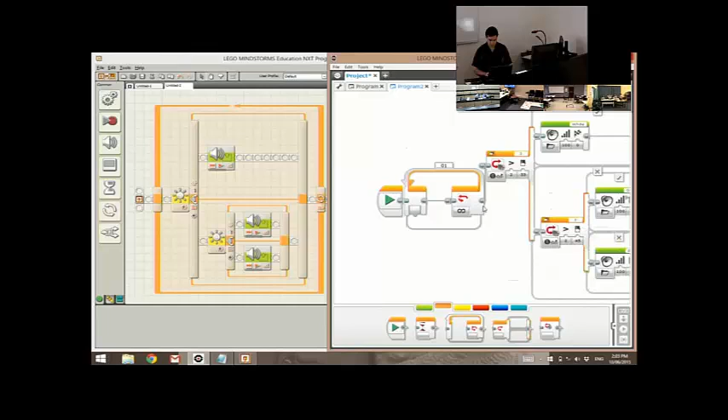There we go. Does that make sense to everybody? Wave your hands madly in the air if that makes sense to you. Good.

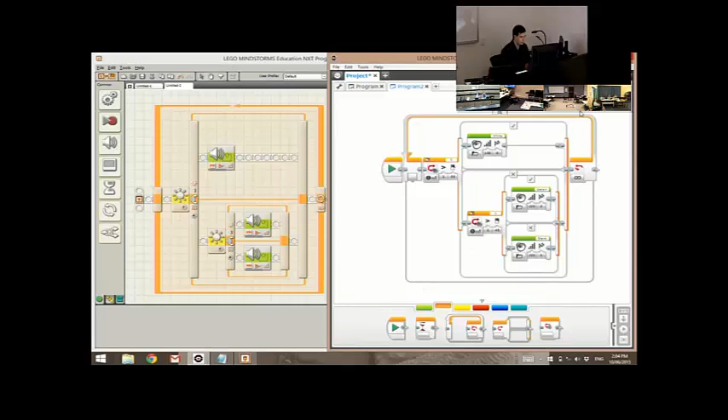We need to pack up very soon. So like I said right at the start, the aim of today is just to show you the basics behind a lot of these different parts. This is not the only way to solve this challenge. There are many ways of solving this challenge, but this is just one way of doing it. Once you can identify between the black, the green, and the white, you can then start asking the question: what do you want the robot to do for each of these colors?

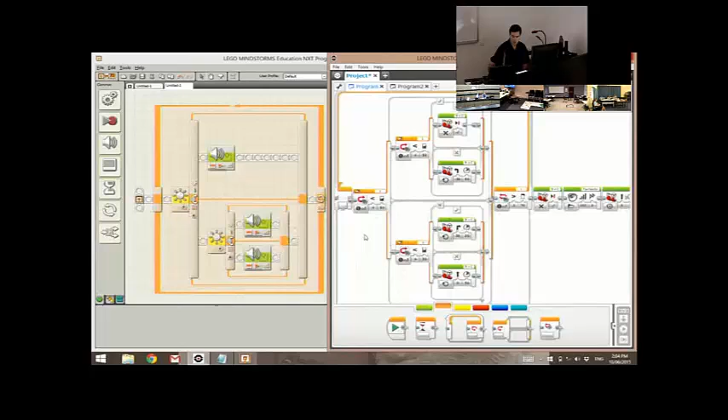So in previous programs, we have said when the robot sees white and then white, go forward. But you might want to have a think about what happens if we see white and then green, or what happens if we see green and then white. That will tell you what side that shortcut marker is on, and from that you can decide whether you need to turn left or turn right.

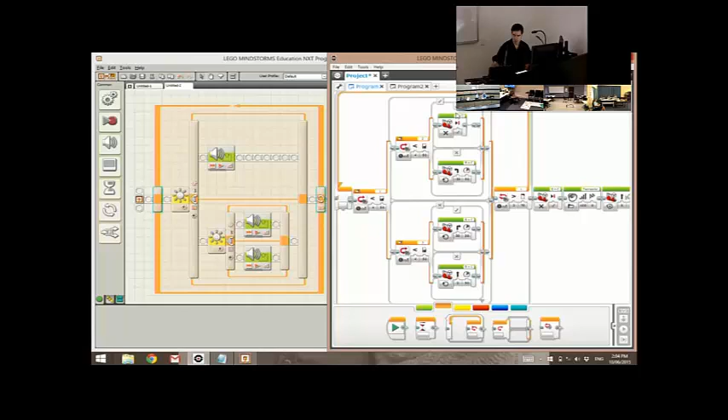The green shortcuts are tough. They are certainly a challenge to try and solve, and to try and solve reliably.